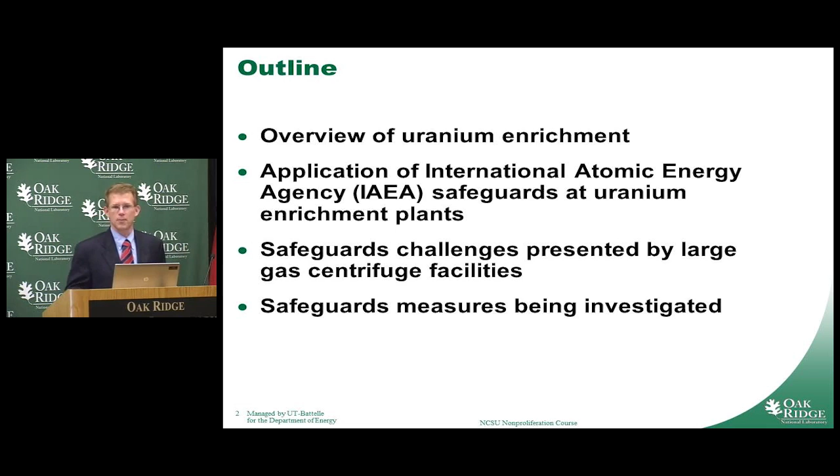My talk today: a brief overview of uranium enrichment in terms of the facilities and operations relevant to IAEA safeguards, a brief overview of what the IAEA actually does in terms of safeguarding an enrichment facility, and then a look at the current challenges and some of the technologies being investigated to respond to those challenges. I understand we'll have a question and answer at the end, but please don't hesitate during the talk if there's a burning question to break up the monotony of me speaking.

Uranium enrichment dates back a long time. We're approaching the 100th year anniversary of the discovery of isotopes, which took place in 1913. In regards to uranium, it dates back to 1939 when it was learned that neutrons cause fission, leading up to the Manhattan Project. But as early as the 1920s and 30s, a variety of separation processes were being developed to separate extremely small quantities of some of the noble gases, neon, chlorine, and others. At that time, there was R&D on gaseous diffusion, thermal diffusion, and gas centrifuge. So in some regards, separation technology is a very old technology.

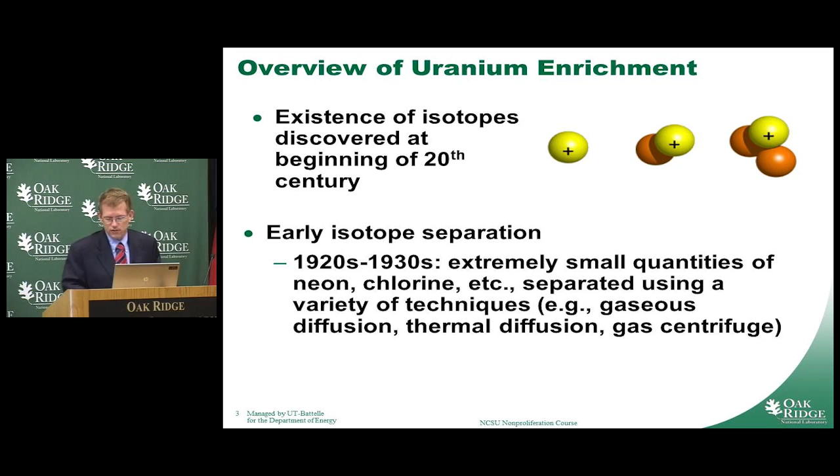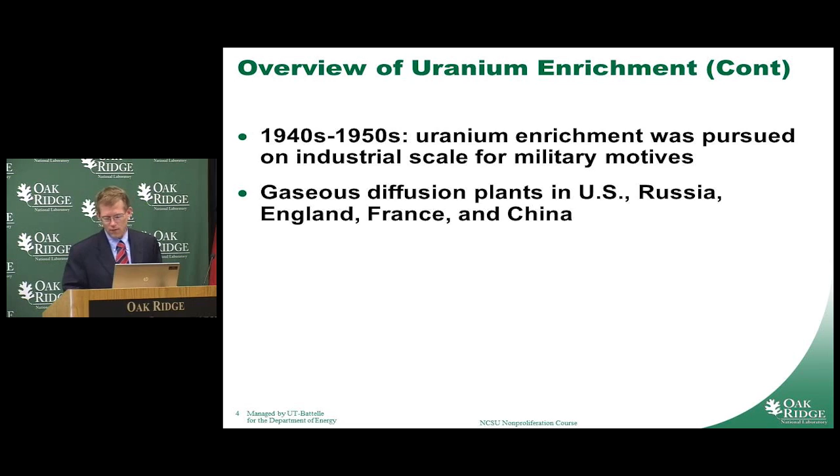It wasn't until the Manhattan Project of World War II that there was a need to separate very large quantities of isotopes on an industrial scale. We saw the production of enrichment facilities here in Oak Ridge for the purpose of separating the U-235 isotope from the predominantly U-238 material. The gaseous diffusion process was the most economical at the time. There was some work on using the calutrons here at the Y-12 plant, but it was a very energy and costly enterprise, so gaseous diffusion became the technology of choice. We built 3 very large plants here in the United States. Diffusion plants were also built in the United Kingdom, in Russia, in France, and China, and proved to be the technology for providing most of the highly enriched uranium for the weapons programs in those countries.

It was then in the 60s through the 80s that we saw the peaceful uses of uranium enrichment become a growing factor in the separative capacity market. As the peaceful nuclear fuel cycles were being developed, most of these reactors relied upon slightly enriched uranium, on the order of 3 to 5%, to run the pressurized water reactors. At that time, economics became more of a factor. The gas centrifuge separation technology, requiring less energy than gaseous diffusion, became a technology of more interest, and we saw gas centrifuge programs emerge in the U.S., in Russia, in England, as well as in non-nuclear weapon states such as Germany, the Netherlands, Japan, and even in the 70s, work taking place in Australia and a few others looking at R&D activities.

A brief overview of the fuel cycle: uranium in the form of U3O8 ore concentrate is mined out of the ground. Typically in the better uranium mines, the amount of uranium ore is on the order of 0.1 to 0.2%, so 1 to 2 out of 1,000 mass units would contain the uranium ore. This material is sent to a mill where the uranium ore is separated from the rest of the dirt, gravel, and other material, concentrating it to a level of 70 to 80% U3O8. This is often referred to as yellow cake, the product. At this time, there's been no change in the isotopic concentration, so it's still natural uranium, which has a U-235 concentration of what, audience?

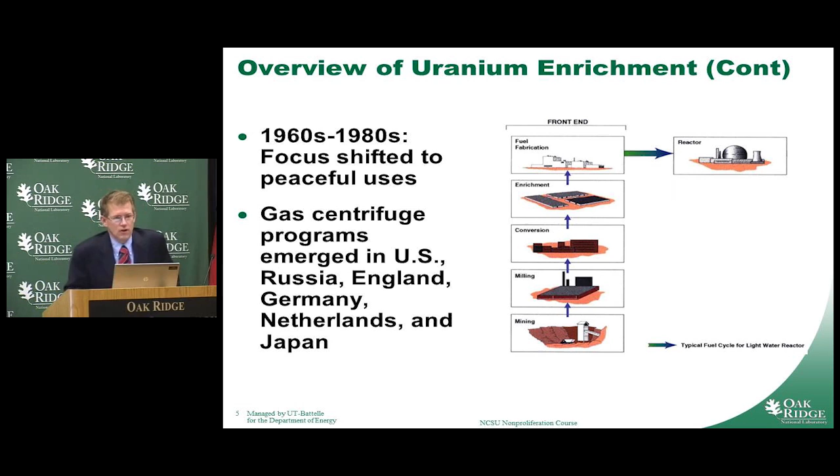This enriched UF6 will be sent to a fuel fabrication facility where, through a variety of processes, it will be converted to a uranium oxide in pellets, put in the rods, and then assembled into assemblies, which is then sent to the power reactors for the production of electricity.

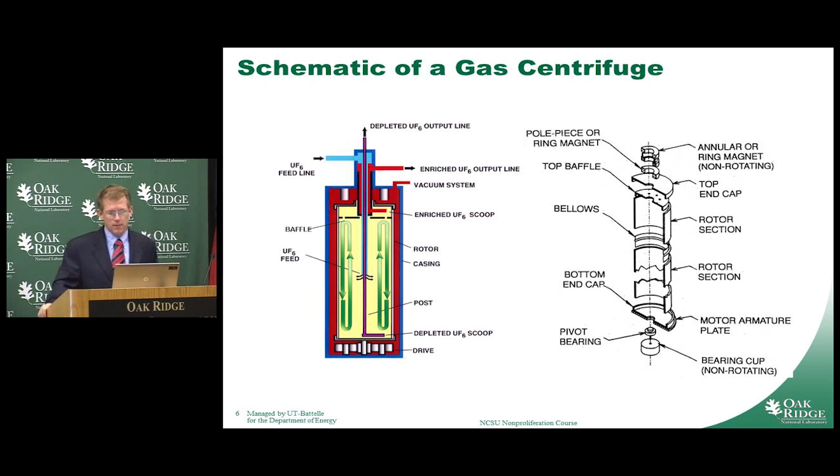A rough rule of thumb, or if you look at the theory, the amount of separation that can take place inside a single centrifuge is proportional to the length times the velocity, or how fast you spin it, to the 4th power. So those building centrifuges are looking to make tall centrifuges that spin at very high speeds, recognizing the physical constraints of being able to balance these machines and prevent them from crashing.

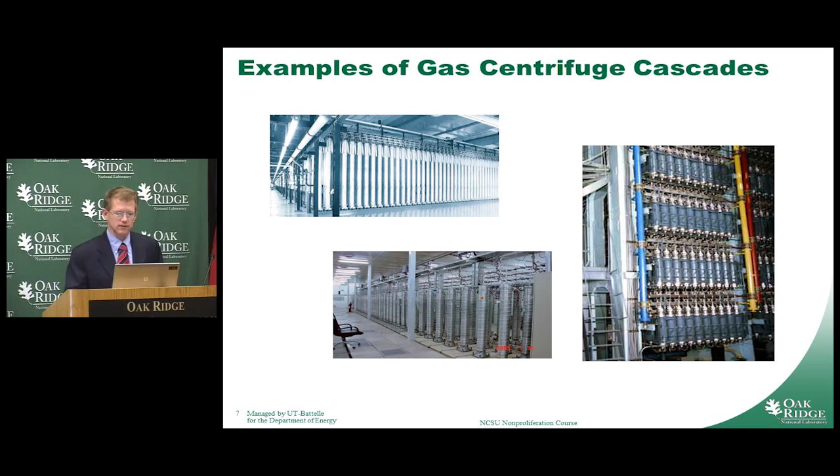So in terms of the enrichment cascade, it's the capacity of the individual machines, and secondly, the configuration - how they're connected together. We use this schematic to give a brief overview of the actual physical operations that take place at an enrichment plant.

First of all, this UF6 that is produced - where? Well, one of the participants was a little more enthusiastic that time.

At the conversion plant, natural UF6 is produced and put into large standardized cylinders, typically made of steel, that may hold 10 to 14 tons of material. These are shipped to the enrichment plant either by truck, rail, or some other mechanism.

Then nuclear material accountancy starts to take place - there are other lectures in this course about material control and accountability - where cylinders are first weighed to get a value for the gross weight, based on the operating plant's requirements.

Some number of these cylinders may either be NDA'd or statistically sampled to verify the purity and isotopic concentration of the material. This material is then put into a storage queue until it's time for the contents of a feed cylinder to be transferred to the process.

At this point, UF6 at ambient conditions is basically a solid - a solid white crystalline material with a small amount of gas above it. The triple point, where liquid is present, occurs at higher temperatures, so this material is a very safe chemical composition for storage on site.

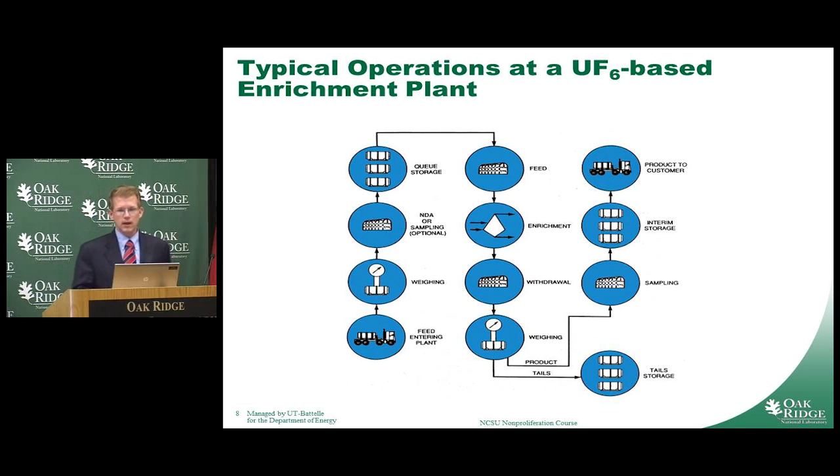The product cylinders are then homogenized and sampled to make sure that the product material meets the specifications of the customer in the contract, put into a short-term storage area, and ultimately shipped to the customer, which again is typically the fuel fabrication facility. So these are the major operations that take place at the plant.

Now, this is a very busy schematic showing where a lot of these operations take place.

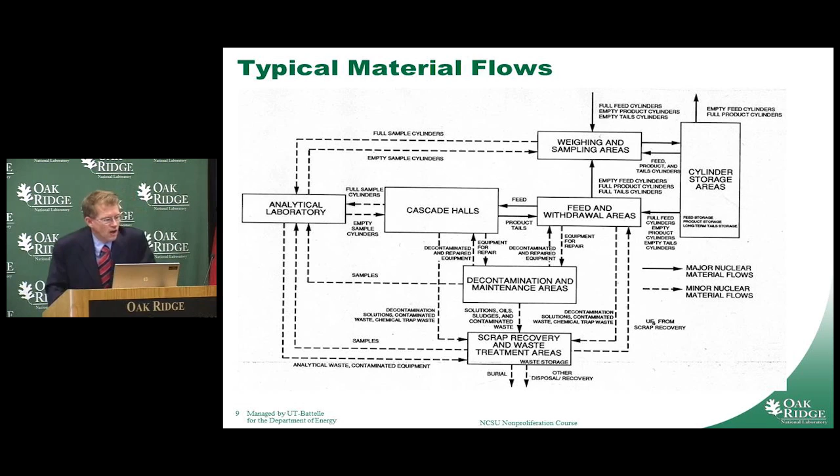You see cascade halls, feed and withdrawal areas, weighing and sampling areas, storage areas, laboratories, decon and maintenance areas, scrap recovery and waste treatment. It's a busy slide because an enrichment plant is a busy operation. You've got these large cylinders moving on-site, off-site, in the storage areas, into the feed and withdrawal areas, and gas to the cascade. These are the solid lines that you see primarily in this upper corner of the schematic.

What you also see by the dashed lines are a lot of the minor flows that take place. These can be samples that are moved from sampling areas or the cascades or the decon to the analytical facilities for accountability purposes, environmental health and safety purposes, or others. From a safeguards and accountability viewpoint, we are interested in all these flows where material transfers from one container to another, or from one side of the facility to another. So we have an interest in all of these activities.

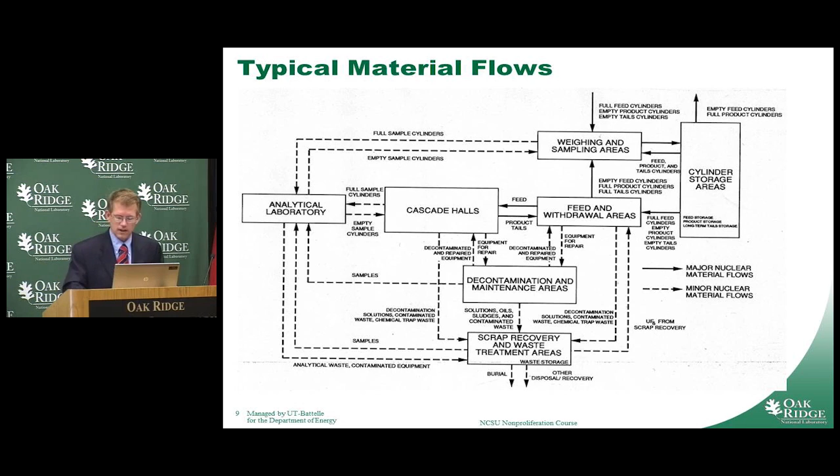So let's look to see what large-scale plants are in operation today. There are two that are still using the gaseous diffusion process, and let me start at the bottom, within the United States. Earlier I mentioned we built three. The K-25 plant here in Oak Ridge was shut down in 1985, or at least placed in standby in '85 and ultimately shut down in '87.

There was one in Portsmouth, Ohio that was shut down in 1991, I believe was the right date, or right there in the early 90s. So the third, the Paducah plant in Paducah, Kentucky, is still in operation. It came online in 1954, 1955, and has been running continuously for 56 years. They're hoping to keep it running another couple of years anyway as they're switching to centrifuge.

The other large one, George Besse 1 in Tricastin, France, operated by the Atomic Energy Commission of France, is a large plant. It started in 1982, I believe it was. The French are currently building a large-scale centrifuge plant, and so we're expecting GB1 to shut down sometime towards the end of 2012.

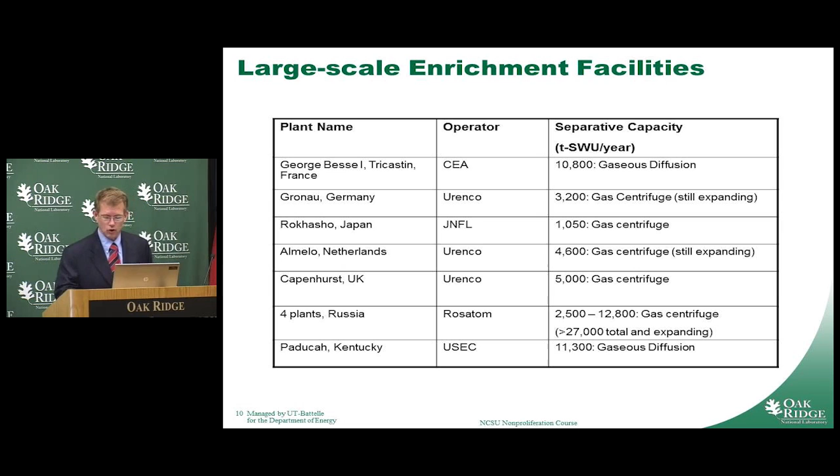Switching gears a little bit, let's talk about the IAEA. I think there are some other lectures in this series that will refer to IAEA practices. Just as a brief review, the IAEA applies safeguards at facilities at the invitation of the facility owner's government. So these are voluntary activities that take place to provide the international community assurances that the operations at these facilities are as declared. The IAEA was created in 1957, so they have now been in existence over 50 years.

Over 150 member states are party to the IAEA, and I guess it's important to point out you can be a member to the IAEA without being a signatory to the Non-Proliferation Treaty. There's a lot of overlap there, but being a member of the NPT is not a requirement for being a member of the IAEA.

The IAEA as an organization is actually a very small organization, only on the order of about 2,300 staff members supporting 6 different departments. There are representatives from approximately 100 different countries. As a UN organization, they try to divide the jobs proportionally among the member states. Within the Safeguards Department, who we're primarily interested in, they have about 500, a little over 500 employees.

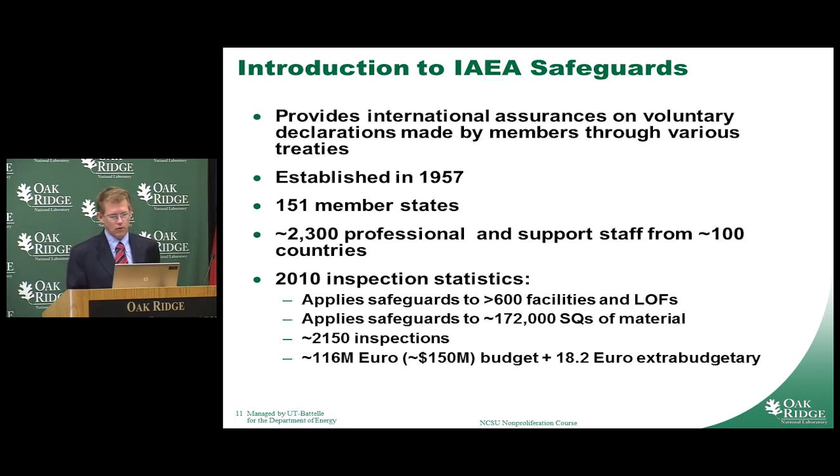In 2010, they performed a little over 2,000 inspections, and their budget is extremely small, on the order of 120 million euros, which with the current exchange rate is about $150 million. Very small budget.

The objective of IAEA Safeguards at an Enrichment Plant is threefold. First of all, they want to be able to provide the timely detection of the diversion of any declared material, uranium material, and here we're looking primarily at UF6.

Secondly, they want to be able to detect in a timely fashion the misuse of the facility for two different types of scenarios. The first is the production of excess material at the declared enrichment, because if you've got a source of excess LEU, you are well on your way towards being able to produce direct use material.

Thirdly, and probably most importantly for us, is to be able to detect the misuse of the facility to produce higher than declared enrichments, in particular HEU, highly enriched uranium. The IAEA definition of HEU is 20% or more in terms of the enrichment of U-235.

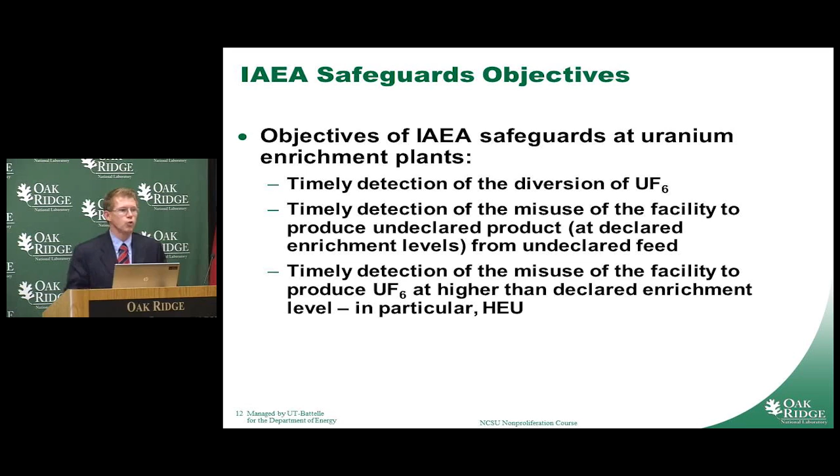Primarily, we're looking at 90+% enrichment. So if a plant is a commercial plant for producing low-enriched uranium for a regular nuclear fuel cycle, typically that product is on the order of 3 to 5% enriched. So this third objective is to verify it's not 20% or higher being produced at that plant.

The IAEA safeguards measures are threefold. The first of which is to look at nuclear material accountancy, that is accounting for all the material on the plant site as declared by the operator.

Secondly, they supplement nuclear material accountancy with containment and surveillance that helps provide continuity of knowledge in between measurements, such as to reduce the amount of remeasurement that the agency has to undertake during inspection.

And the third is the inspection itself, sending inspectors to the site to make sure the actual conditions on the ground match both the operator's records on the site, and also those records they receive directly from the national authority.

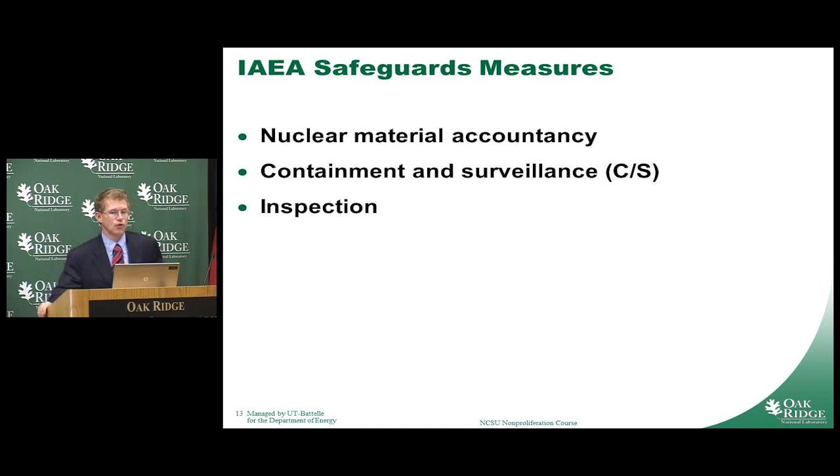So what are the major challenges at an enrichment plant? Four of the more predominant ones that I want to address: first of all, there's not a current means of independently verifying the actual separative capacity.

An enrichment plant, let me focus primarily on gas centrifuge technology, uses those centrifuge rotors that I showed at the beginning. You actually don't see the rotors themselves, you see the casing. By looking at the casing, you cannot tell the materials of construction. You may get some feel for the length of it, but not how fast it's going.

And what did I mention? The separative capacity is based on the length times the velocity to the fourth power in terms of theoretical separation capabilities. So by looking at one of these devices, you will not be able to see what the capacity is.

Also, the information needed to determine that is sensitive, probably classified information held by the technology holder, who is bound not to share information that would allow someone else to produce material for a weapons program. So as an inspector, they will not be able to get precise information on the height or the speed.

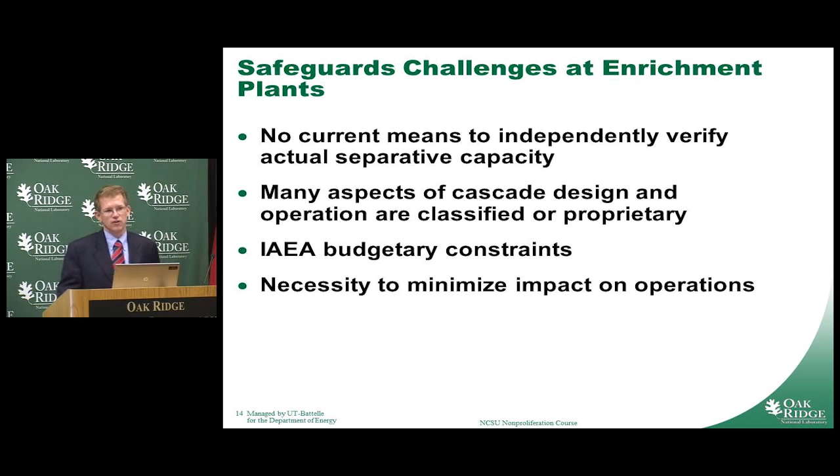Only a couple hundred inspectors. And as part of the comprehensive safeguards agreements the IAEA signed with national governments, one commitment is not to impact normal operations. Because if you really wanted to know what was going on at one of these sites, you could shut the place down for a month, count everything, measure everything, and really know what material is here to make sure the records are correct. However, an enrichment plant runs continually forever, so shutting it down is a significant impact on operations. Also, when they're shut down, they're not producing material that can be sold. So it's a challenge to verify these declarations without unduly impacting operations.

Beyond the scope of this series, we could talk about HEU production scenarios and how a plant could be misused to produce excess low-enriched uranium. But some of the indicators associated with those are shown here. Let me first talk about some of these pictures.

This is a picture showing the end of a cascade, showing some of the typical piping that goes out. It's probably too difficult for you to read—I'm not sure I can read it myself right here. Uh-oh, my cursor has died. I'll see if it comes back up.

Here is one of the feed pipes where the UF6 goes into the cascade. I think up here is one of the product pipes. There are a lot of other pipes that may contain instrument air, emergency purge, and everything else. So even if I declare what material is supposed to be in what pipes, there are a lot of other pipes, and if you're looking at a facility misusing their equipment, you have to independently look at all of these activities. The second picture shows a portable feed and withdrawal cart that can be used during startup or during recovery from an emergency, like a power failure, which shows the capability to link a small cylinder to the cascade through a pipe here.

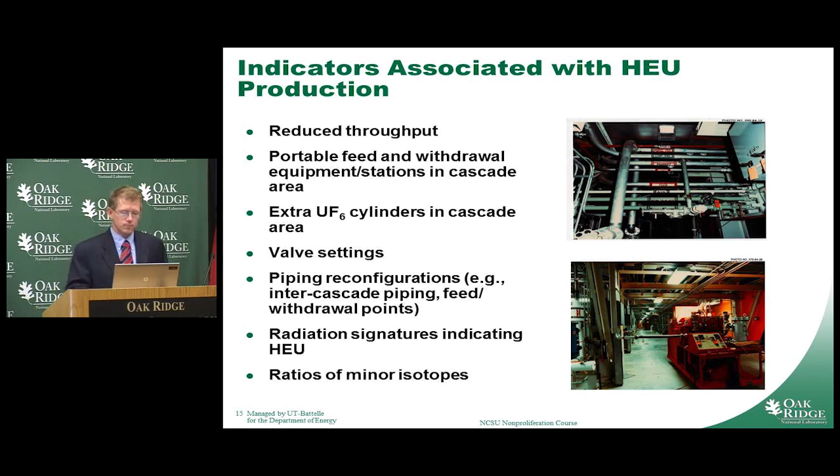The safeguards approach developed for gas centrifuge plants was actually developed by the technology holders at that time in cooperation with the IAEA. They developed what was called an LFUA inspection, a limited frequency unannounced access. This was developed in what was called the hexapartite safeguards project that took place between 1980 and 1982. The technology holders agreed to provide the IAEA with four particular activities that could be conducted inside the cascade: visual observation, radiation monitoring and NDA measurements, sampling, and the application and verification of seals.

So, based on what you've already learned thus far in this lecture, for visual observation, what do you think inspectors would be looking for? They're going to be looking for some of this feed and withdrawal equipment, seeing if by some manner the cascade arrangement has been changed, maybe get a feel for the number of total cascades, anything to get a feel for how much separative capacity has been installed, how it's being used, whether operations and activities are being performed as declared. Secondly, radiation monitoring and NDA measurements—what are the inspectors trying to do there?

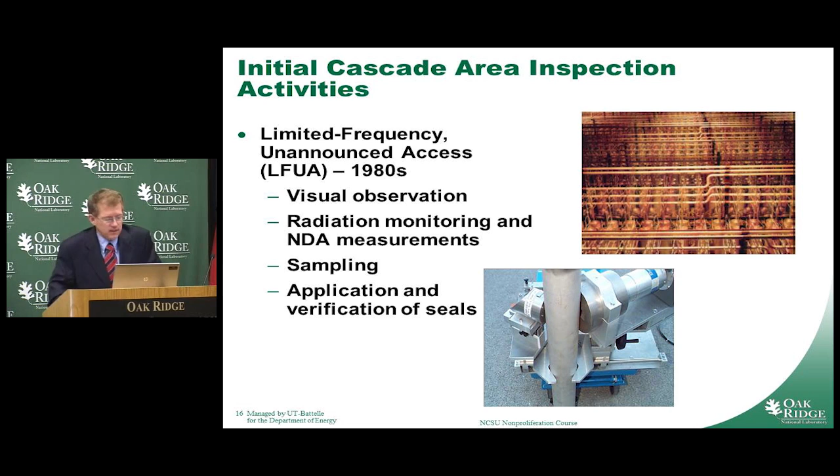One is in the mid-90s, the implementation of environmental sampling, where the IAEA will take cotton swabs, as shown in the top picture, from various places where they had access. And then these samples could be brought back, sent to a very small number of very high-performance laboratories in their network around the world to do ultra-trace analysis that can look at individual particles.

To determine if there are higher than declared enrichments, also recognizing the need for some type of continuous monitor as operations had continued to develop. Some technology holders had developed what we refer to as a dynamic, flexible cascade, where you don't necessarily need to do a lot of reconfiguration or valve changes to change the performance.

So the picture bottom right shows a sodium iodide detector that could be clamped onto one of the process pipes that could continuously measure this pipe with a very low count rate, but provide kind of a go, no-go answer that there has not been a significant change in the operational level of that pipe.

Also, at one facility, they encountered a problem where they had some significant holdup. This was the UF6 that either solidified inside the process piping, or if UF6 interacts with any moisture that leaks in, it will react with the water to form a solid UO2F2 deposit. So this was a portable neutron detector designed to go through to be able to estimate that inventory.

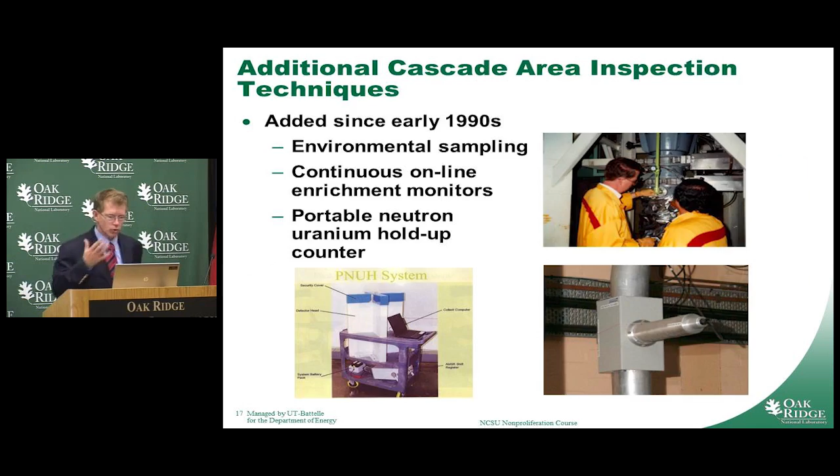So the plants that I showed you earlier were those that are in operation today. Currently, there are a number of new facilities under construction. Now, earlier I mentioned there is already more capacity than demand, right? So why are new facilities being built today?

Thank you, Tim. Tim's working on an enrichment profile, so you should know these.

Well, there's a couple of factors leading into this. The two gaseous diffusion plants which combined have a capacity of about 20 million SWUs are being shut down in the near future, so the companies building these facilities are racing to replace that.

A second factor is there's been a large quantity of LEU, low-enriched uranium, being introduced to the market from the U.S.-Russia program, where the Russians have been downblending 500 metric tons of HEU back to LEU, and that program is completing its contract in 2013 or 2012.

2013, so there will be the replacement of that. And then thirdly, before the Fukushima accident, there was a lot of talk about growth in nuclear power capacity around the world. The early reports show that countries pursuing nuclear power, primarily in Southeast Asia, are still continuing with their plans. So any new power plants will need capacity.

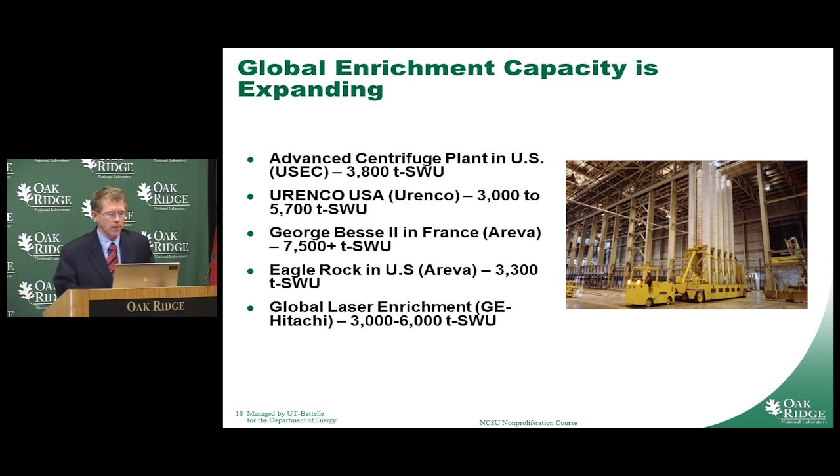So the challenges as these new plants are being built remain the same as they were in the 80s: no means to independently verify separative capacity, the aspects that were classified and proprietary continue to be, the IAEA budget has grown a little bit but not substantially, and the difficulty of implementing these LFUA inspections.

When the first plants were being built in the early 80s, they actually only had a capacity of a couple hundred thousand SWUs, and you may be looking at 6 to 8 cascades. The largest plant that they had envisioned when the technology holders were meeting was on the order of 1 million SWUs per year. Now we're seeing all of these are 3 to 7 times, or in the case of one Russian plant, 12 times larger than that.

So you can imagine that they may have 60 to 100 cascades, a much larger footprint. One thing about these LFUAs I didn't mention earlier: these were one-day inspections, on the order of 1 to 8 hours per inspection, with very controlled capabilities. So these larger plants are making it very, very difficult to continue to effectively implement these LFUA inspections.

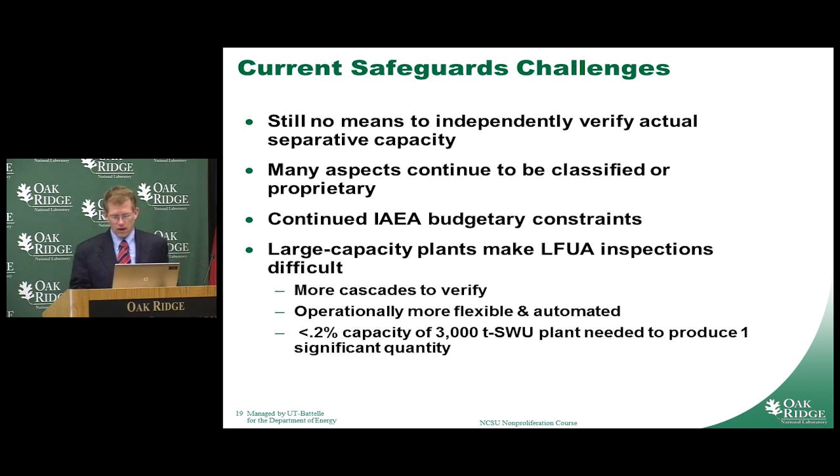Plus, with all this additional capacity, the time frames necessary for a breakout scenario are much, much shorter. So this is what has led the agency and other concerned member states to look at the tools available for the IAEA and what they could do there.

This really started kicking off when the agency hosted the first meeting of technology holders in Vienna in April 2005, to go back and look at the safeguards approach developed in the early 80s, to ask if it's still appropriate for meeting the safeguards objectives for enrichment plants, and whether there are new tools that should be considered. Without going into detail, the conclusion was those safeguards measures were still appropriate.

However, with the increased size, they were looking at taking better advantage of operator information to see if they could move more towards either some continuous process monitoring by sharing operator instrumentation, or applying what is referred to as SNRI, short notice random inspections, to better address this detectability and the timeliness of inspections.

And the agency basically captured all of this in what they referred to as the model safeguards approach, which came out in 2006. It's the technology holders that are most interested in what the IAEA can and cannot do. I already mentioned they're concerned in that, on one hand, they are obligated to protect classified and proprietary information. On the other hand, there is a strong desire among the technology holders to make sure that the safeguards as applied by the agency are credible, effective, and universally applied.

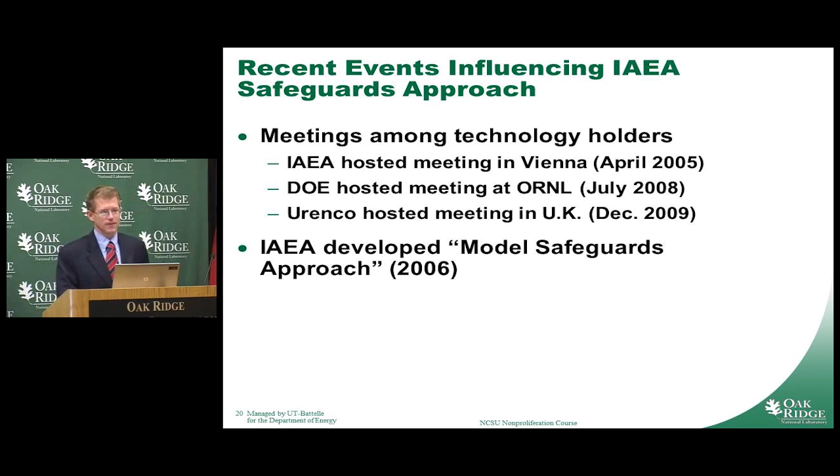Currently we're in the process of looking at having another meeting sometime in the spring of 2012. I won't say more here because it hasn't been finalized yet, so look for INMM papers on this topic in the future.

So the IAEA needs, some of which I mentioned earlier, what was identified at this 2005 meeting was the ability to conduct short notice random inspections at facilities, to have continuous monitoring of these operations, shared use of operator data, looking at continuously monitoring items of interest, particularly these cylinders containing the UF6, and also abilities to analyze some samples on site as opposed to shipping nuclear material to laboratories back to Vienna and around the world.

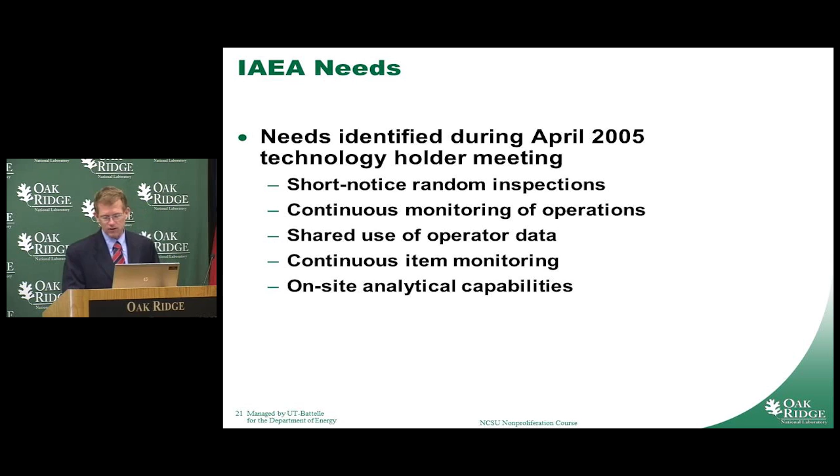Safeguards measures investigated over the last half decade include measures that would allow for continuous unattended verification of UF6, either tracking of cylinders as they move around the plant site, looking at equipment the agency uses such as process scales where they weigh every cylinder when full and empty for MC&A activities, and looking at improving online enrichment monitoring capabilities to verify that enrichment has not exceeded the limit for the plant.

The facility operators also do a lot of measurements on their accountancy scales, and if there's some way the agency can share information and data directly from these scales, it would cut down on having the operators repeat these measurements in the inspectors' presence.

The other two bullets are portable analytical equipment to provide more timely information to inspectors in the field, and looking at better tools for verifying design information.

One of the requirements of facilities under inspection is that they provide a design information questionnaire describing the facility layout and how they interact with the cascades. Part of the agency's requirement is to look at excess LEU and HEU production scenarios as well as diversion scenarios, identify what types of physical changes might be required, and look at tools for verifying that the plant design has not changed.

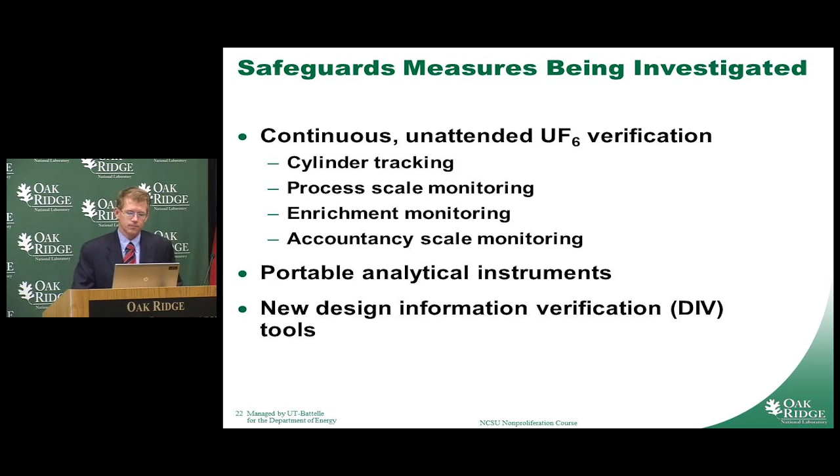Cylinder tracking: here are a couple of pictures of cylinder yards. The bottom right shows 30B cylinders used for containing enriched UF6, with an inside storage area holding dozens of cylinders. The other two pictures show external cylinder storage areas.

Each of these cylinders can contain up to about 14 tons of material, so they can be quite large. The picture on the right is a European facility where you can see hundreds of cylinders. The bottom one is the Paducah plant.

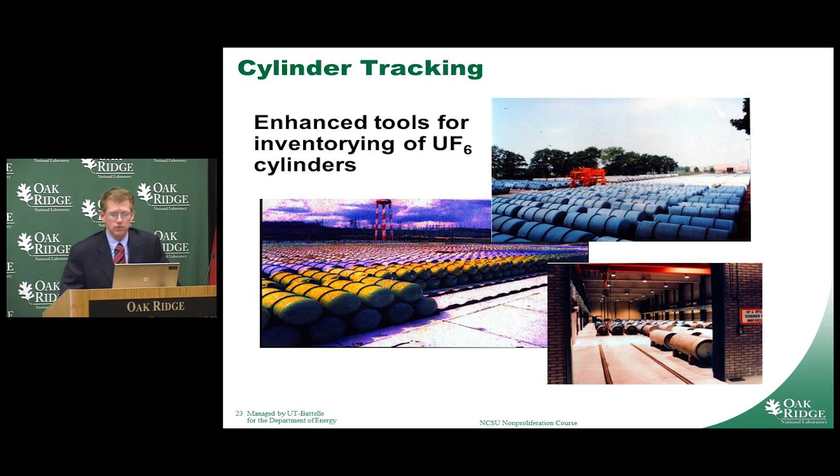After 50 years of operations, they have acquired over 40,000 tail cylinders. So as an inspector, if you're trying to verify that the content of none of those have changed, you can see what a daunting task that would be.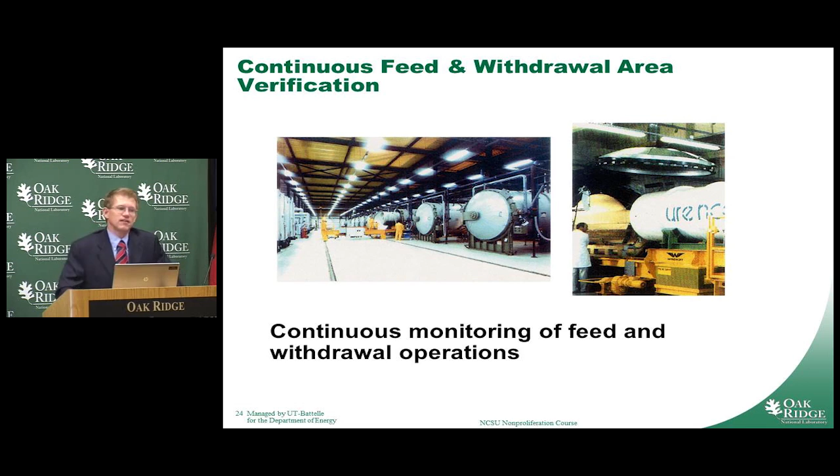As mentioned earlier, when not in process, the UF6 are in these cylinders, and part of the continuous operation at the plants is to connect these cylinders to the process and transfer material either from cylinders to process or process to cylinders. If there's some way to continuously monitor these feed and withdrawal activities, it could significantly change both the frequency of inspections and the activities inspectors have to do on site.

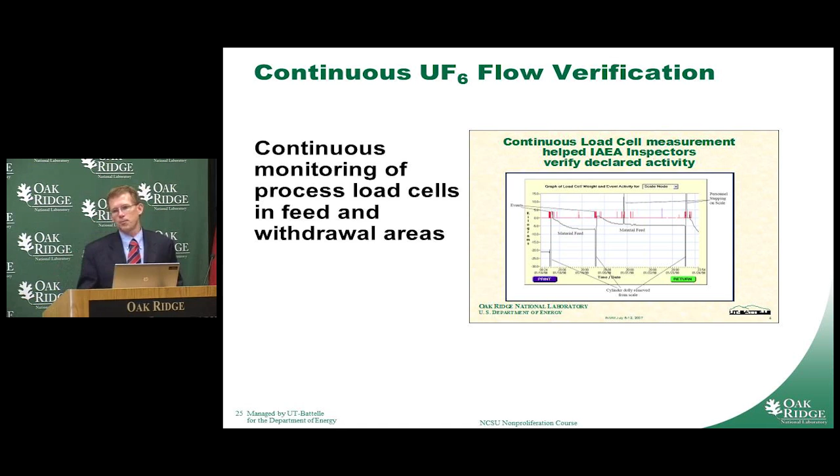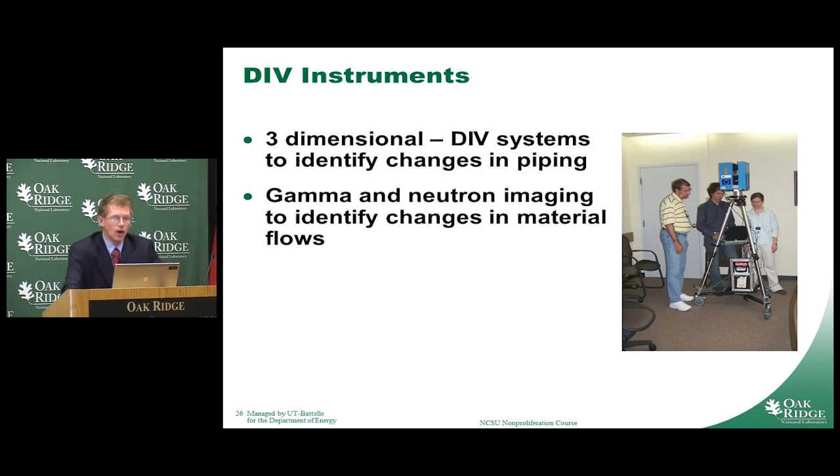While we are focusing on these large facilities right now to try to minimize an increase in the amount of effort the agency has to apply to them as they grow larger, we're also mindful of the application to smaller facilities, to make sure the same technologies are indeed appropriate.

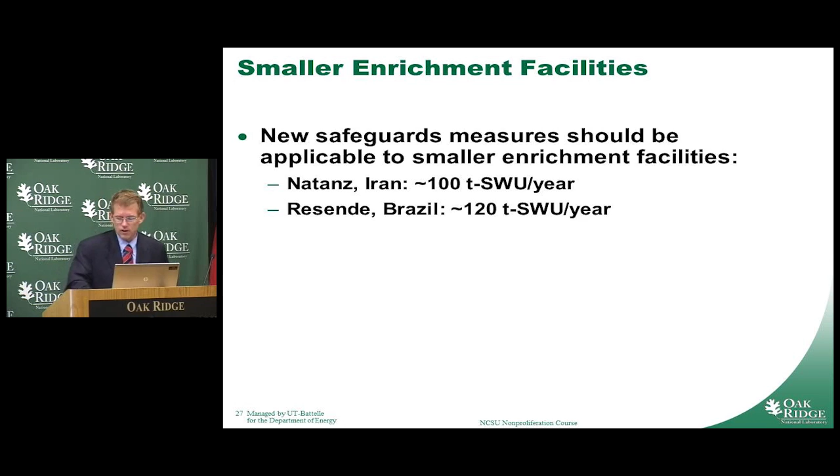So to close out, a few final thoughts. This new construction in enrichment facilities, and the expansion of capacity in some of the existing ones, has reinvigorated within the safeguards community the discussion of looking at the efficiency and effectiveness of IAEA safeguards measures for the first time since the early 80s. And this has really been taking place over the last 7 or 8 years.

In response to this, the agency has developed a new model safeguards approach that has increased some of the tools at its disposal for reaching safeguards objectives at specific facilities, and this has identified some additional tools and techniques that are yet to be demonstrated.

A number of member states, including the United States, are actively doing R&D on some of these measures to see if we can prove the capability to improve verification activity, and we're looking at the universal application of these measures once they become accepted as approved IAEA measures.